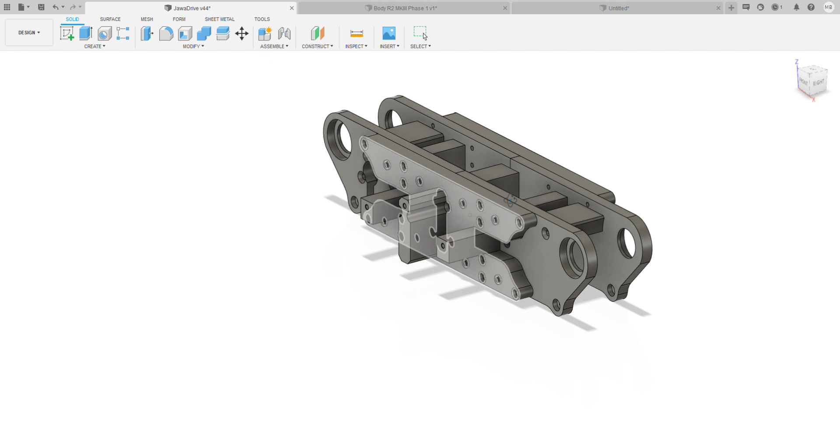Okay, just a little video on the Jawa drives. Just wanted to kind of talk through the basic assembly. Both the drives are virtually identical, the front and back. There's a very slight difference in how they're actually mounted.

So the rear drives, what you've got is two 6mm holes here and here, and there's a 6mm bar that goes right across, because the rear Jawa drives are fixed on that bar, and the front ones are actually on... In fact, I might be able to just show you the front drive. So the front drives are a little bit different. No, that's the steer frame. Yeah. So the front drives.

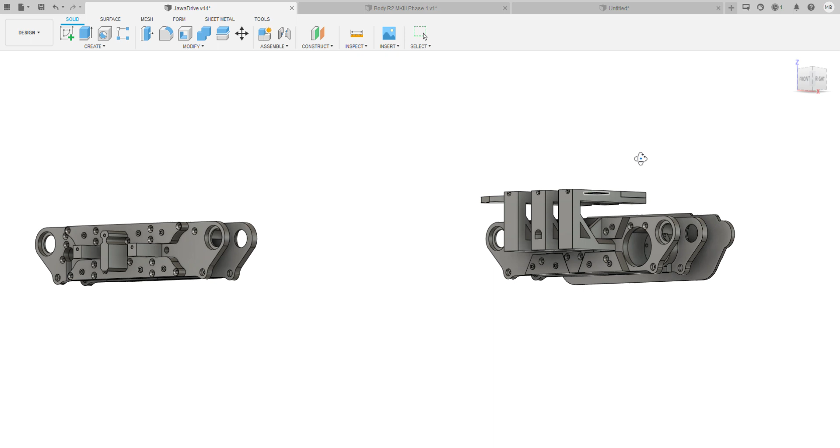There we go. The difference with the front drives is rather than the bars coming out, they've got these little U-shaped bars that actually provide the support, and the reason for that is that they're pivoted on top so that you can actually steer it. But other than that, the basic assembly is the same. So if you assembled any one of these, you'll be able to assemble the other three. We'll start with the rear ones. They're made up of a few parts.

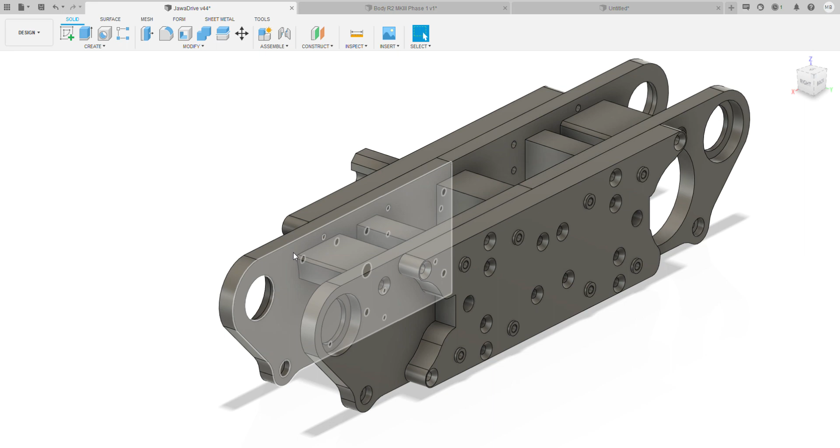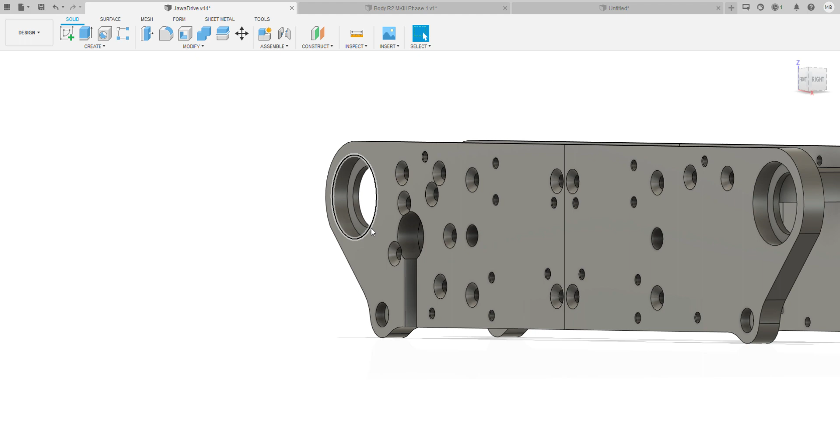The frame. So what I tend to do is print the frame up first. So you've got the Jawa frame. This is C, A. So you've got A, B, C, and D. I'll just take some parts off so you can kind of see how they go together. So there's four flat parts. These are printed obviously flat down. You've got some holes there for bearings. These are 24mm bearings, so 24mm in diameter. I'll grab the actual bearings out shortly so I can tell you which ones those are.

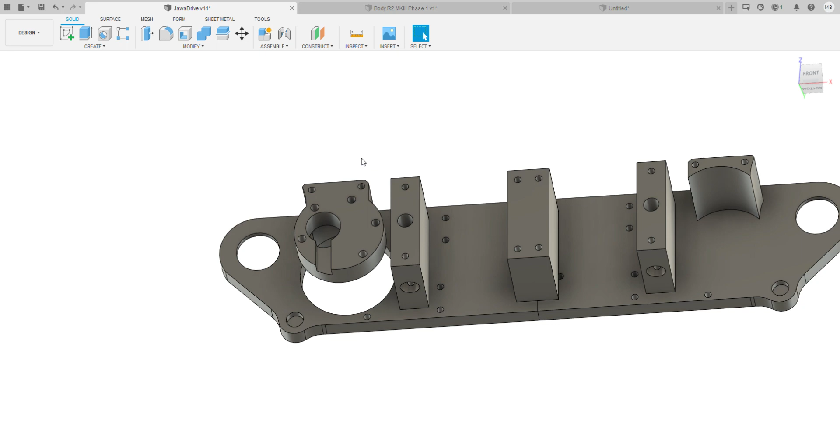And effectively what they do is they'll fit together like this. Fairly straightforward, to be honest. And then in the middle there's a number of frames. So what I'll do is I'll just hide them frames so you can see what you've got. You've got a center block, very simple block, 4 holes in. This just bolts there and there and there and there. When you first put it together it seems a bit flimsy, but believe me, there's a lot more parts that go on. You've got these 2 end blocks here, they bolt in place.

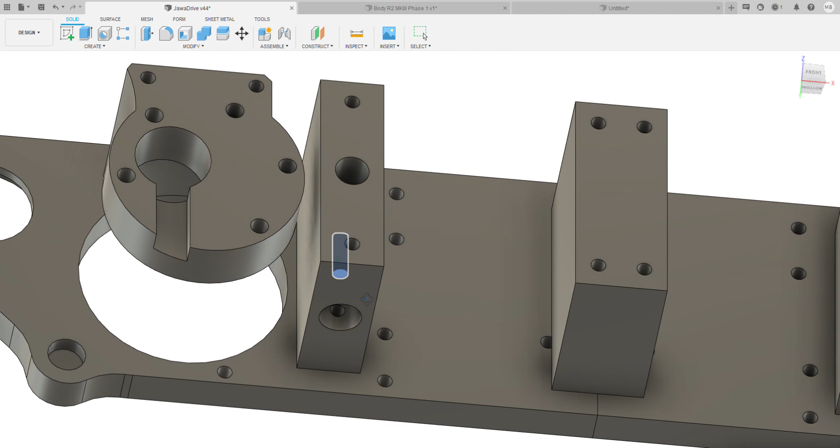Now notice under the end blocks, once they're bolted in, there's a little hole here. That's for a screw. It self-taps into there and it digs into the metal bar that we've got in there. So that's effectively what locks the drives in place with an M3 bolt. If I just do a rough measure on that, 10mm will probably get you through that to dig into that bar, to hold that bar quite solid on those two, and it does hold it solid.

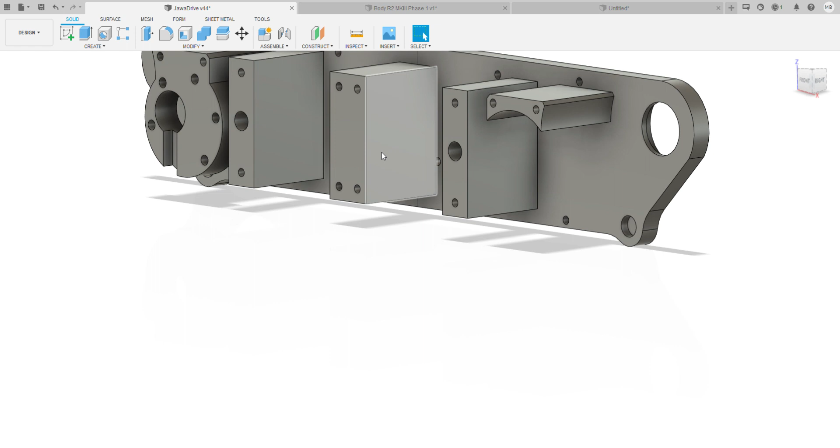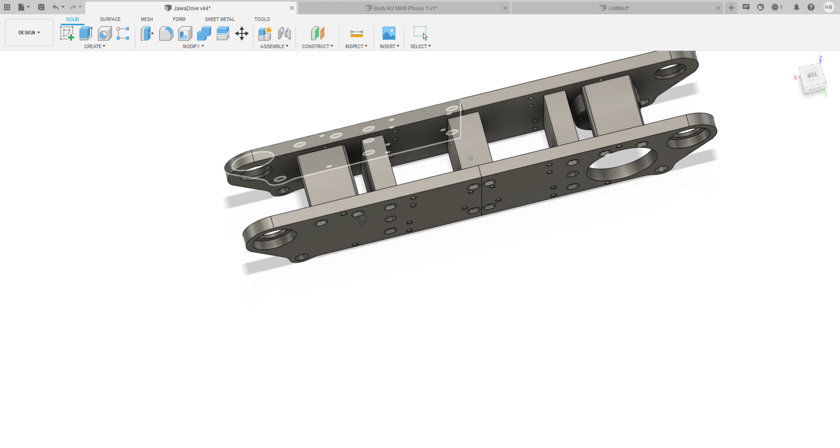Then you've got this frame and this frame. They're slightly different. This one here, which holds the motor, obviously goes at the end where you've got the big hole, because that's where the motor goes. So basically, put these frames together, bolt these parts on, and then you can bolt the 2 outer frames on, and you'll create this kind of overall build.

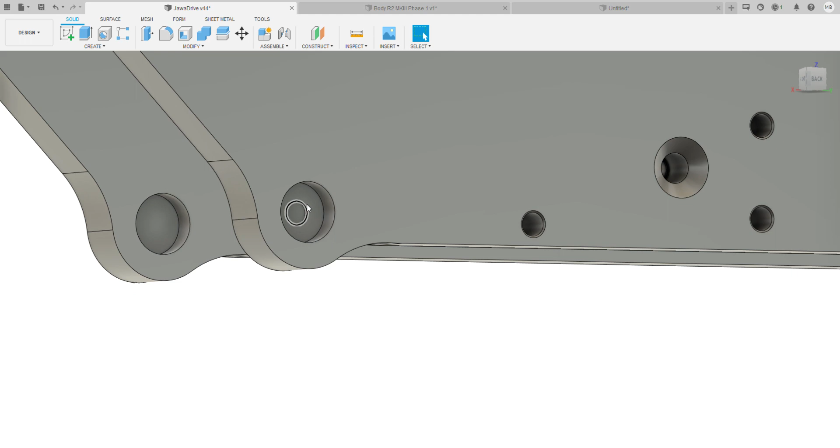Now you've also got these holes here. If you look on both sides of them, the holes are on both sides. These hold the 7 by 3 by 3 bearings. So it's 7mm diameter, 3mm hole, and 3mm depth bearings. You've got 2 bearings, one pops on that side, one pops on that side. So you need 8 of those bearings for each corner. And actually, when you start to add all the wheels, you'll need a lot of those bearings.

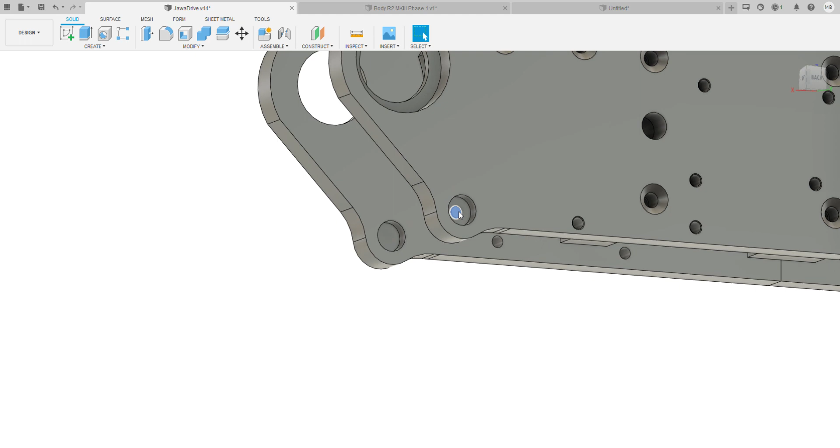Now these are sealed up. The reason for that is it's all down to the bridging, so that we don't have to have any supports. But you can do this at any point, like now, or you can do it as you take it off the machine. Grab a 4mm drill and literally just drill this out. It doesn't have to be perfectly central. All you want is a bit of a lip all the way around, because the bearings will make sure that that's centered. But make sure that you drill this out and just clean it up a little bit.

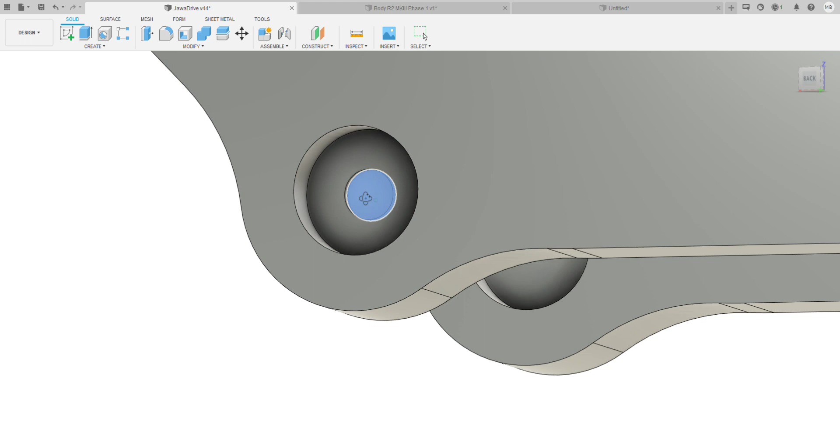So I've left it there. That hole is nowhere near 4mm. What is it? Yeah, it's 2.8. That's about 3mm in diameter. So if you get a 4mm drill, just drill it through there on all 4 of those corners before you start.

It just lets those front wheels spin a little bit clearer. If you haven't done that, don't worry about it too much. It'll all still function and work. It's just that really you do want to sort of drill those out.

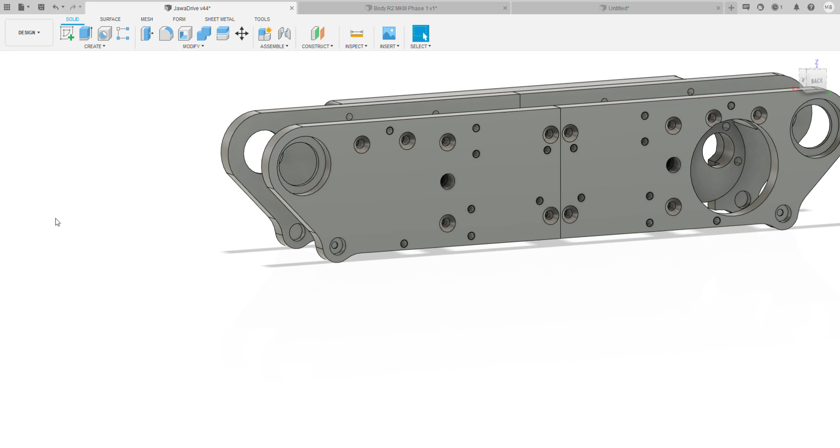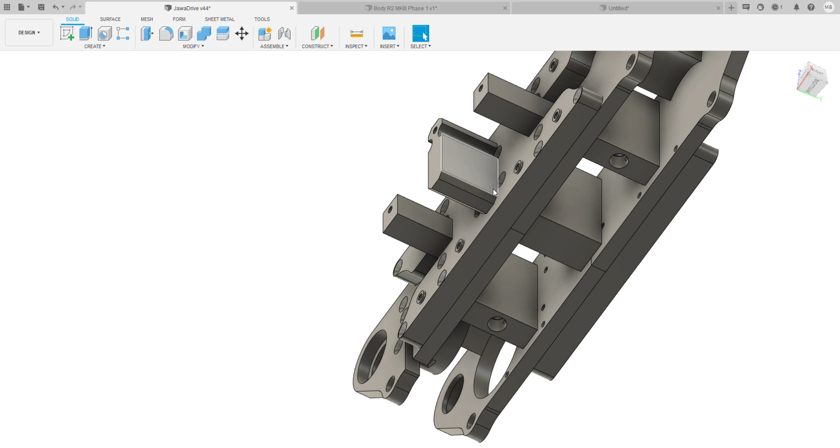Once you've assembled those, then there's 2 outer frames which bolt on the side, and they hold the main set of wheels. So we'll go through the wheels in a sec, but in theory you can probably assemble all of that together. Now on one side you've got these, on the other side you've got some extrusions that come out. The extrusions come out opposite side to where the motor comes out, and the reason for that is that holds the front fascia or front plate.

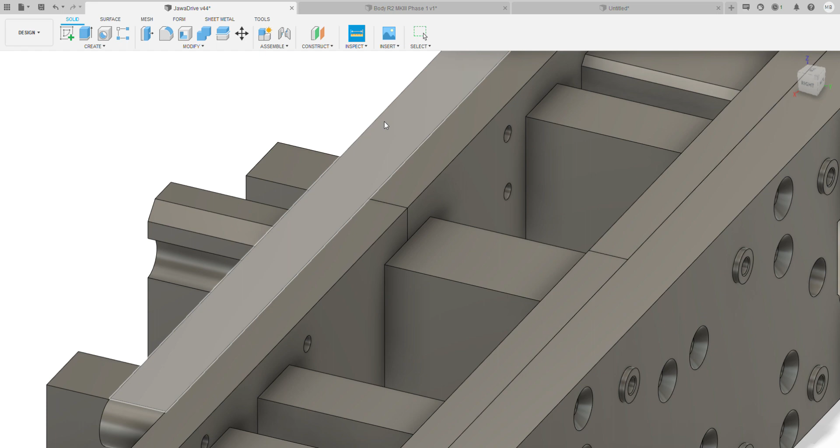So all these are bolted together with M3 bolts. This, for example, is 17 mil. So I'll put some recommendations when I write. You've got 10mm thickness here, so 15mm M3s will do it. But again, if you've got a collection of them, you can just measure them against the side up until the point when I publish all the instructions.

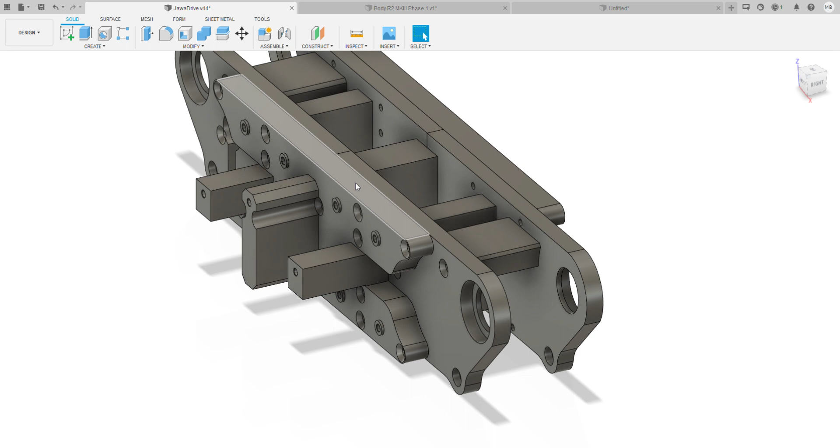There's so many bolts in here. You've got plenty of options on size. It's not absolute necessity that you need 15 mil. You get away with 12 mils or 15 mils or 17 mils or whatever you've kind of got. And if they extrude slightly on the inside, it's not too much of an issue.

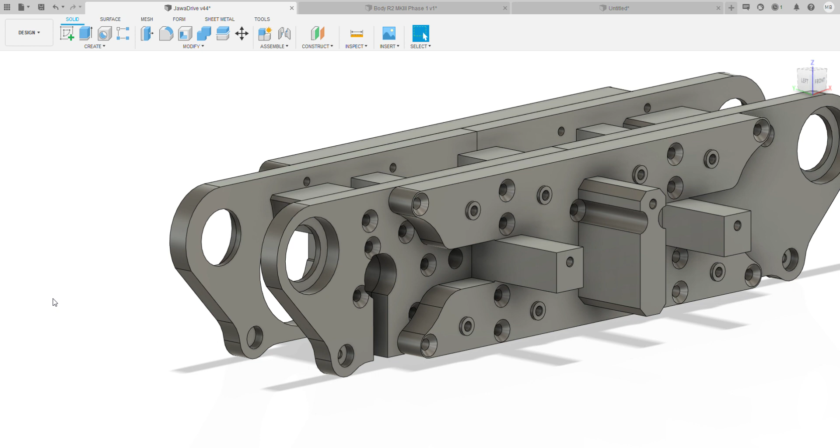Once you've built the main frame or the main plate, what you can do is you can pop these bearings in here, here, here, and here. So 4 bearings at the side. But the next thing to probably add is some of the electronics, well, some of the hardware.

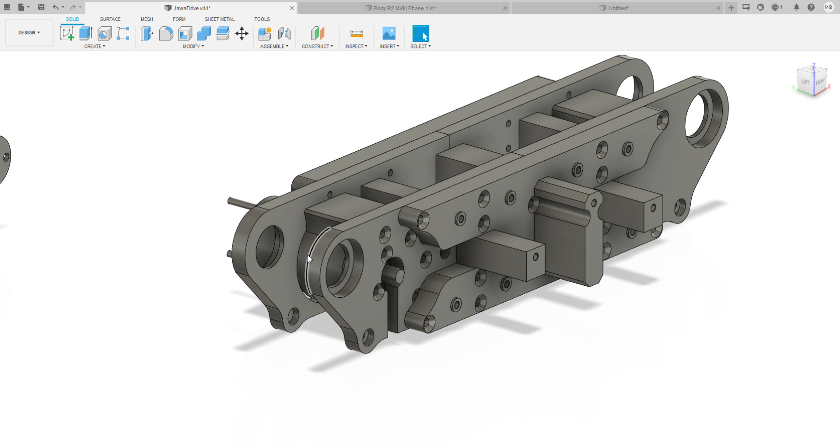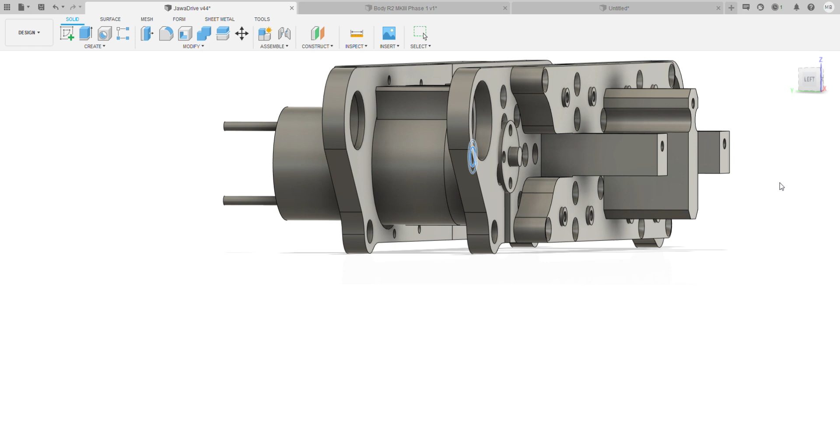So there's 2 things. There's the Pololu motor, which these are the 37D motors. I think I used the 19:1 ratio ones on this, and then there's a Pololu coupler, which is this little thing that holds the gear. So I'll just move that to where it should go, so that coupler just drops onto there like that. And it obviously doesn't push that far in, so you can actually just move it out a little bit like that. So it kind of sits in around about like that, and that holds the main drive gear.

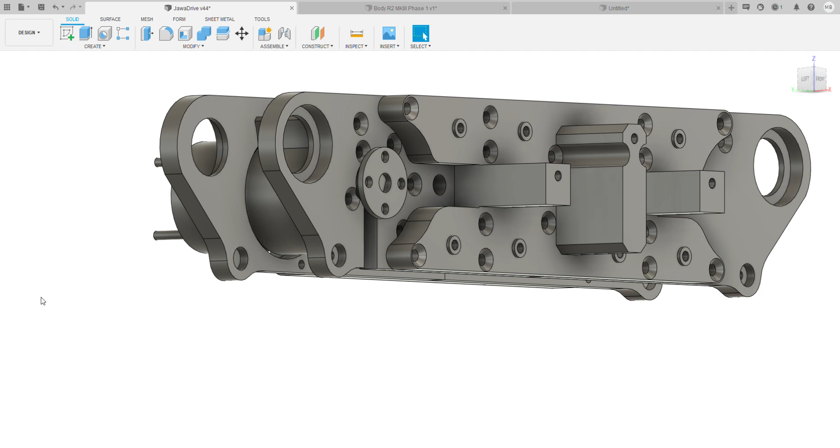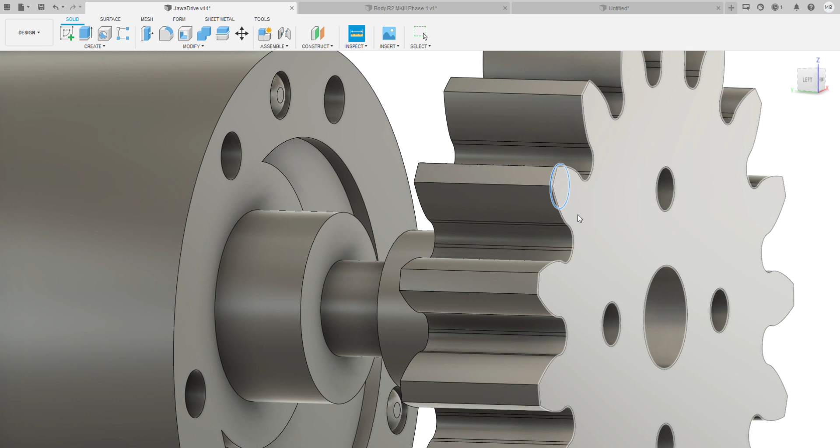So you can pop the motor in. Don't pop the coupler in just yet. You've then got the remaining piece. So the reason we don't pop the coupler in is this gear. So the way this assembly works is you grab the coupler, you put in, I think it's M3 8s will probably do, M3 8mm. I'll just do a quick inspection. Yeah, it's 7.3. So M3 8mm bolts. Pop that in.

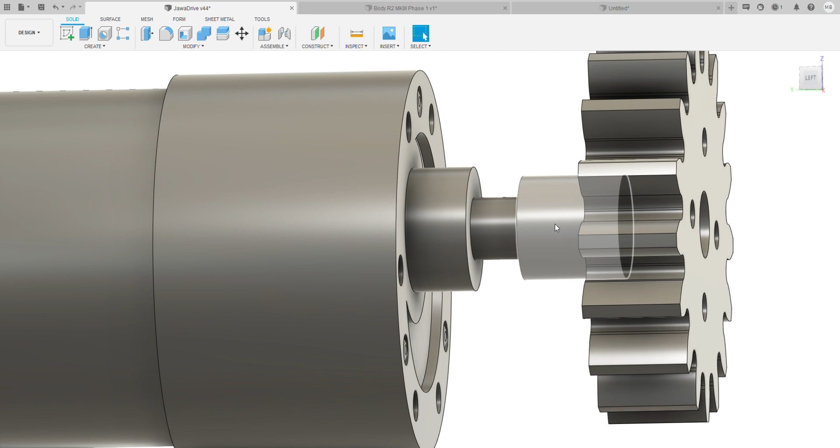4 of them in, tighten them up, that will attach the gear to the coupler, and then the coupler, you've got a couple of grub screws which hold it on. I'd highly recommend you use Loctite on the grub screws, because however tight you tighten these up, they will loosen up. I've got to say with Loctite, keep it away from printed plastic. It dissolves it, it makes it brittle. If you get any coloured Loctite on these gears, they'll just crumble. So use toothpicks or small bits of Loctite.

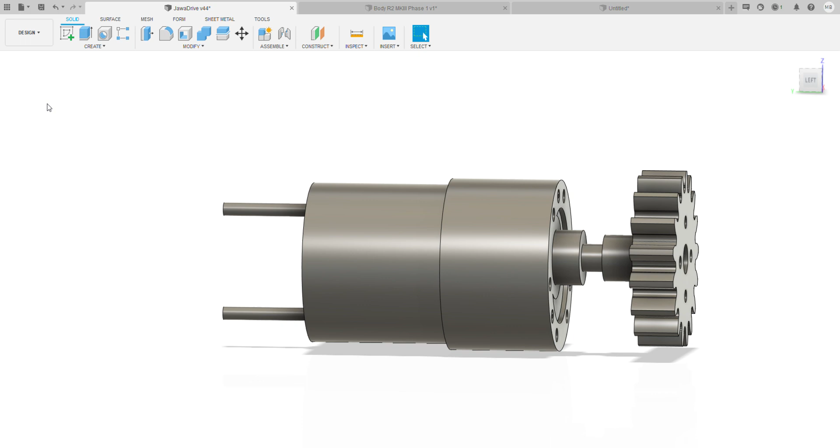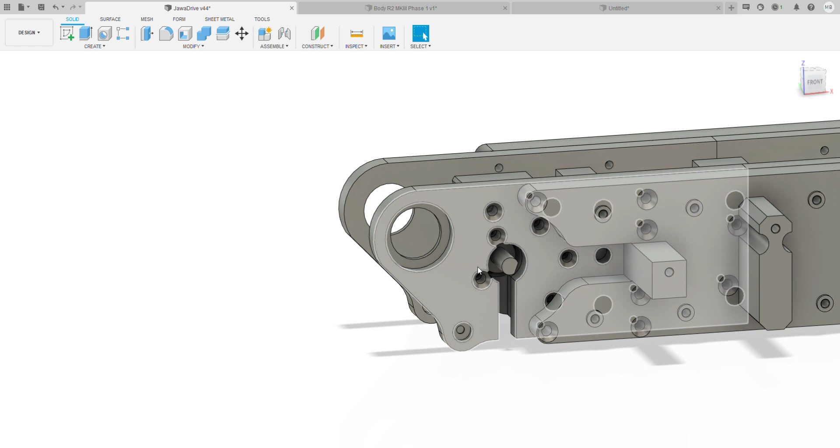Once you've got that gear on, you've got your frame on, you can actually put this whole thing into the frame. Then before you actually put the coupler on, you've got a number of bolts that go round here that attach this motor onto the frame. Tighten those up, and once that's in place, then you can add the coupler and the drive gear. So you should end up with that, and then this gives you this side here where you can solder a couple of wires on, and that's your drive motor done. So once you've completed that, we can then move on to the gear assembly.

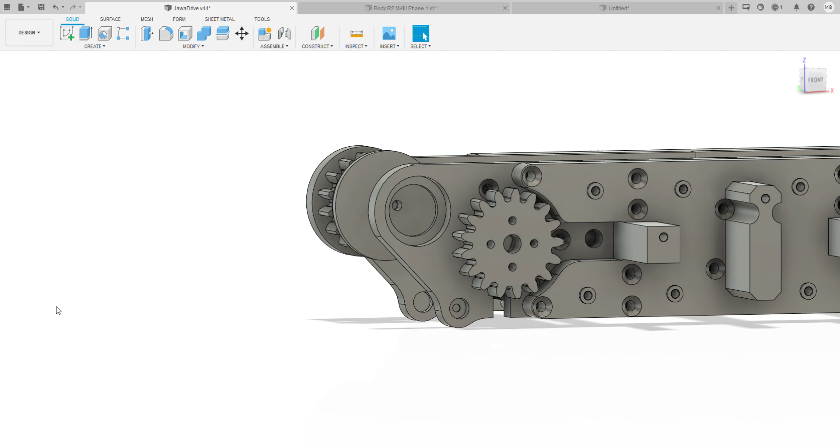Now with these 2 bearings in place, your gear assembly is made up of these 6 gears here. Oops, not 6 gears. Your gear assembly is made up of these 5 gears here, so apologies. So you've got the A gear, you've got this little plate here, you've got the middle, you've got this little plate, you've got this gear on the outside, so it's kind of like a sandwich.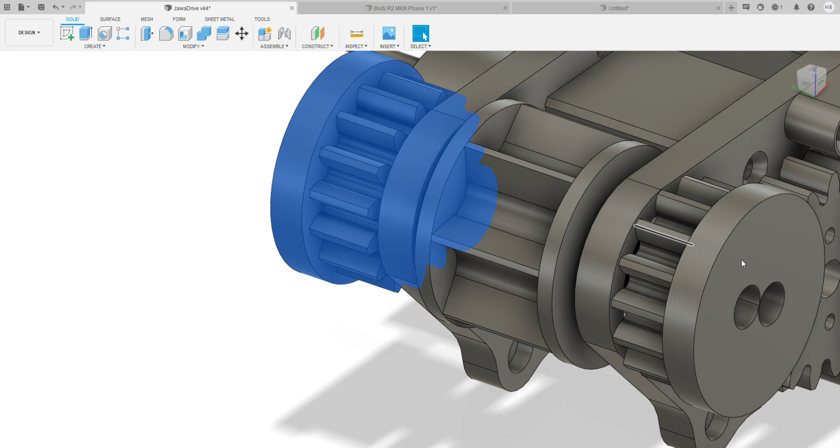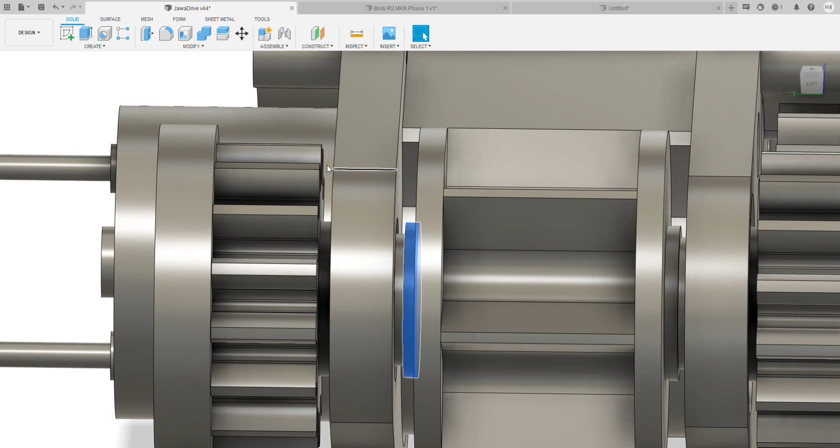Now be aware that these little plates in the middle can theoretically go both ways. You want no gap between this outer plate and the little star drive in the middle. If you reverse them, there's a little spacer which you can probably see just about there, and that'll rub against that side plate. So you want that little shoulder there to go against the bearing.

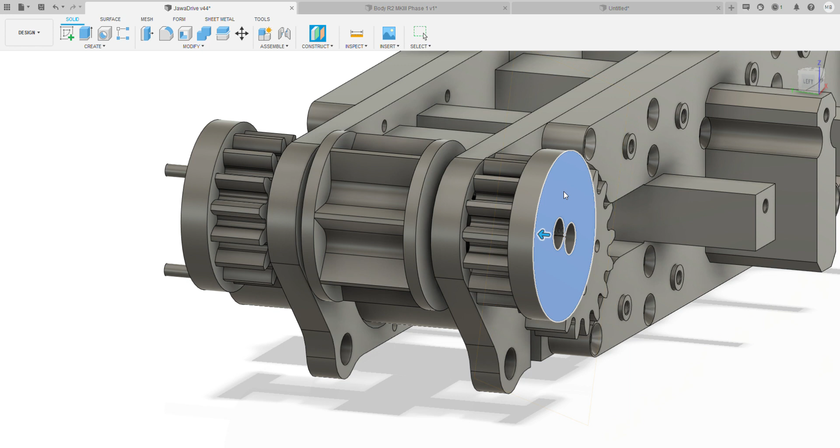These are held in with two 35mm M3 bolts, which kind of go through there. I'll just show you kind of where 35mm goes through. So your bolts will bolt right the way through into about there. So you can get away with 35. You might get away with a little bit further, but I tended to use 35s. Two 35s either side, and they go right the way through to that middle bit. So it gives a really good solid piece.

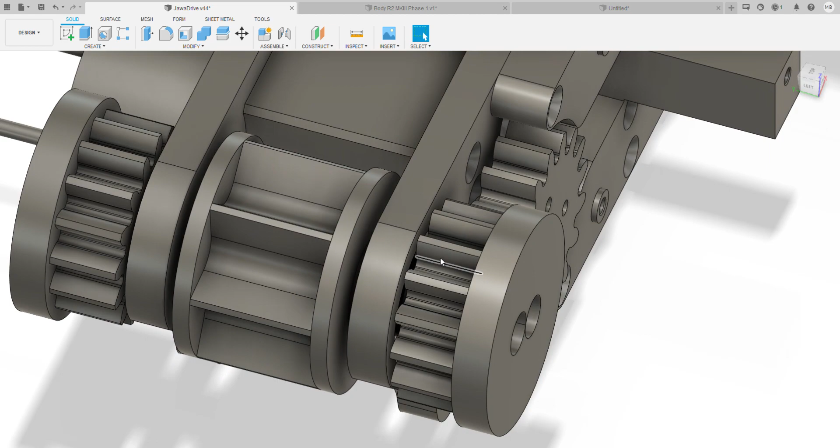And obviously then this gear meshes with this gear. So all you want to do then is just check alignment. If you need to adjust it, you've got access to the grub screws in this little gap at the bottom here. But you really want that in place, and you want that spinning quite freely.

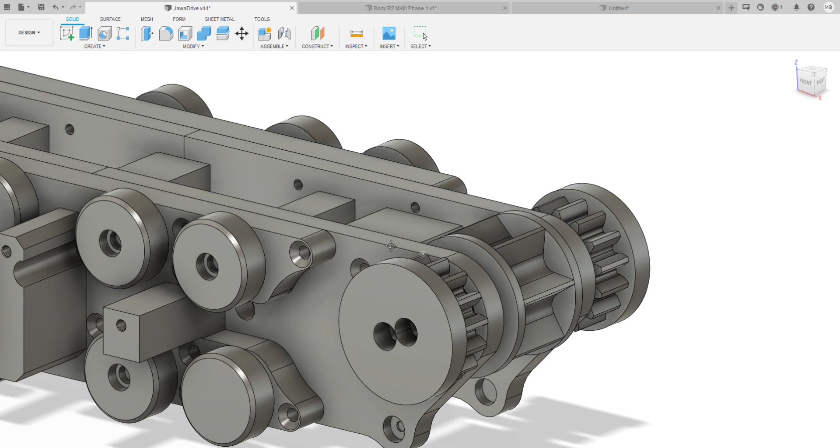Once you've built that one up, you do exactly the same at the rear. So I'll just turn the rear on. So there's another one of those, but this one is freewheeling. It's just free spinning. So you do the same assembly there. And to be fair, the actual assembly is quite simple. Once you've got those two in, you've got the drive going.

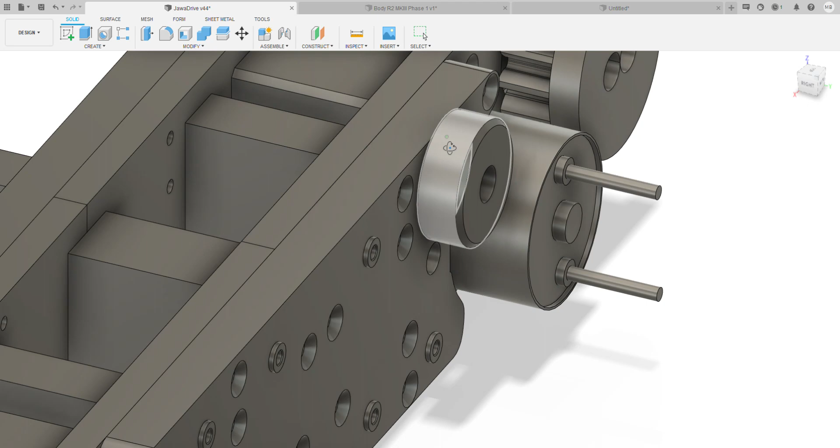The next thing that we tend to put in is the little idler wheels. So I'll show you these again. So these are the wheels. You'll need 16 of these, and these take the 7mm by 3mm by 3mm bearings in there. So 3mm hole, 7mm diameter, 3mm deep, and you've got one bearing on one side and another bearing pushes just on the other side into there. So each of the wheels have two bearings.

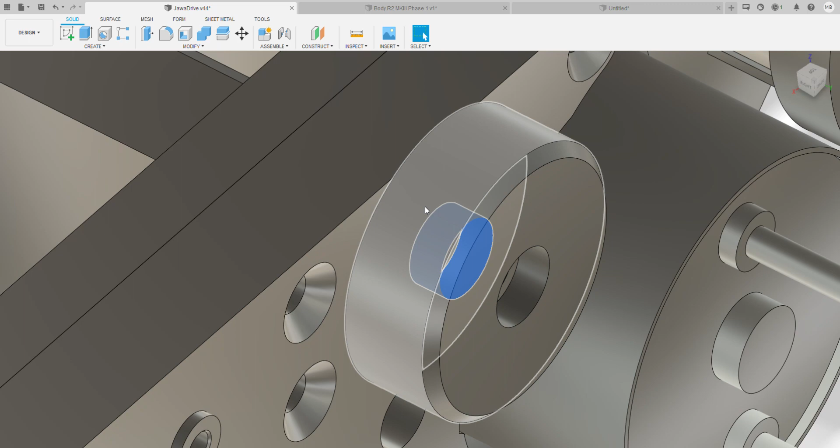So you can imagine that's 16 wheels. That's 32 bearings. Plus the 8 you've got at the front, you're up to 40 bearings already. So there's quite a lot of bearings on this. Same as these little things here. There's a hole in the middle that you can just use a drill just to drill out with a 4mm drill, just to clear that out.

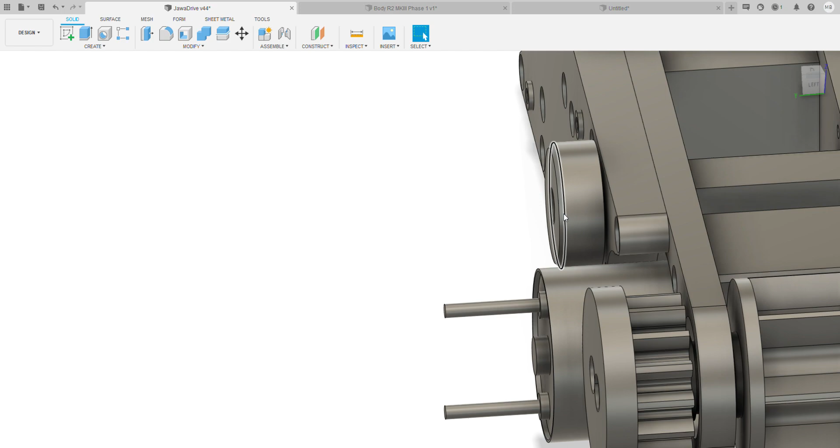And then what happens is you pop these on, and these will actually then mount onto this plate with about an M3 20, so a 20mm M3 bolt goes through that bearing and holds it on there. What I tend to do is tighten it up just to the point when I can feel a bit of resistance, and then just backing it off a little bit so it spins freely.

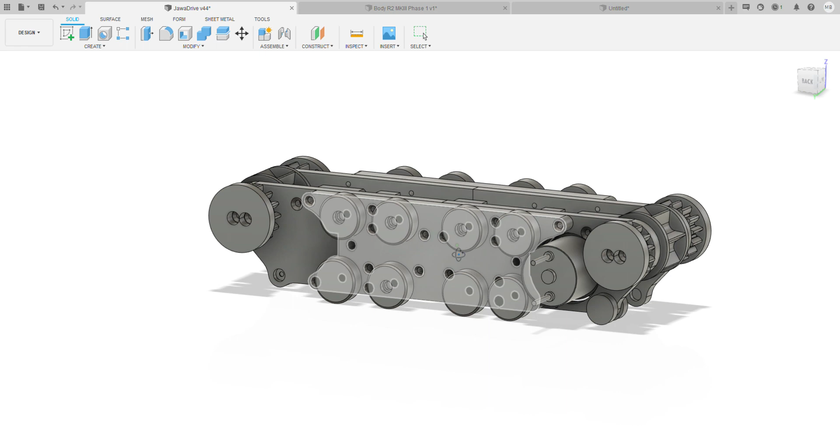Once you've fitted one of those on there, you can literally just go around then and fit all the other ones. So there's a lot of these, so you just pop all these on all the way around. So once you've got these on, the last thing to do then is to put these idler wheels on, which are on the corners. So if I just show you those, you'll see these are tiny ones. You need 4 of each.

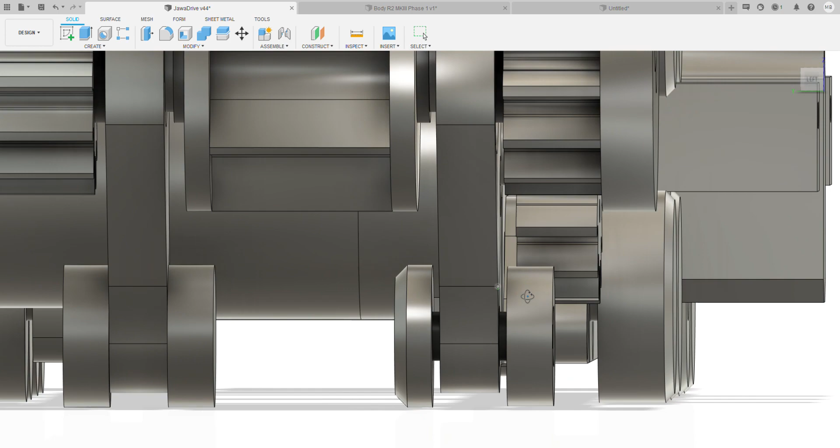And again, just watch out for the bevels. So the bevels on these wheels here go on the outside, and the bevels on these wheels here go on the inside. You'll see some of these that haven't got holes in. Don't worry about those. Those are just spacers on my CAD. They're all the identical same part. Same with these that haven't got holes in. These are me just getting some spacers when I first started to do the CAD.

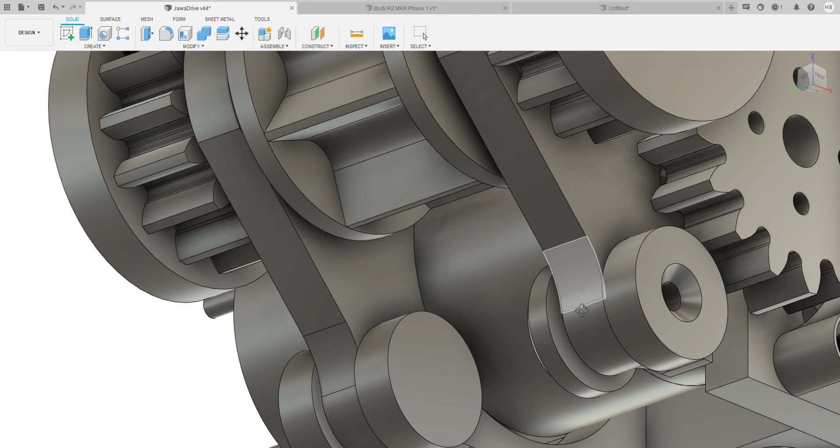So these are really simple. The bearings are actually already in there. You should have put one bearing on either side into the frame. So all you're really then doing is taking an M3 bolt, which 20mm or 18mm actually will probably do it. An 18mm M3 bolt goes through there, through the two bearings out the other side. There's some little shoulder spacers either side, similar sort of thing. Tighten it up, back it off, make sure it's loose.

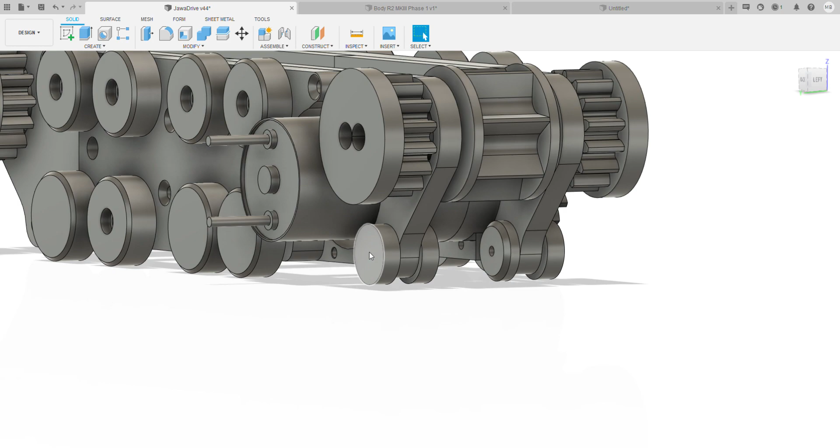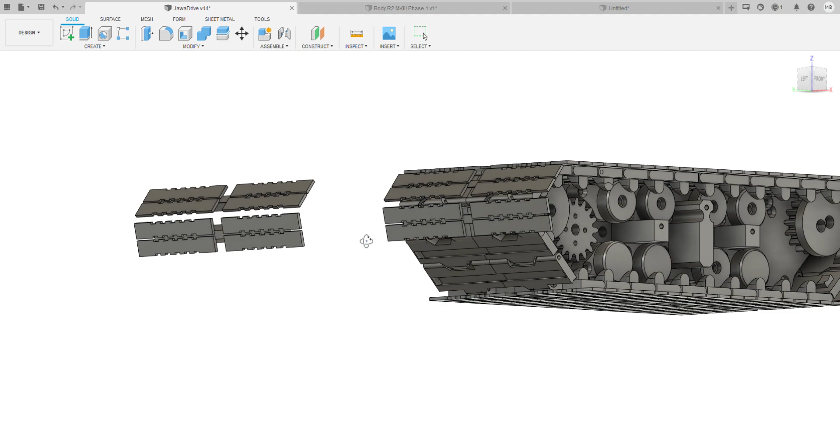Then all you do is repeat that on each of these 4 corners, and that's pretty much your drive system built. Now once your drive system's built, your next thing obviously is tracks. The tracks do take a while to print, and there's a lot of them. There's nothing I can do about that because the Sandcrawler is a massive tractor vehicle, so you've literally just got to print all these things out.

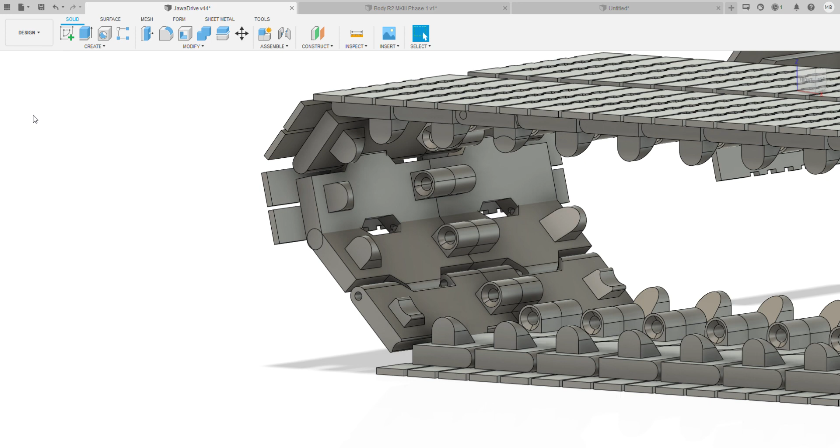The assembly of the tracks, now I'm just going to see if I can get a good view on this. It's the advantage of showing you CAD stuff rather than real plastic stuff, I can start to hide stuff and animate stuff and all the rest of it. So if I just grab some tracks to show you. Select bodies. Okay, so 1, 2, 3. I'm just going to move these out of the way so I can show you exactly how the tracks assemble. So this is one track.

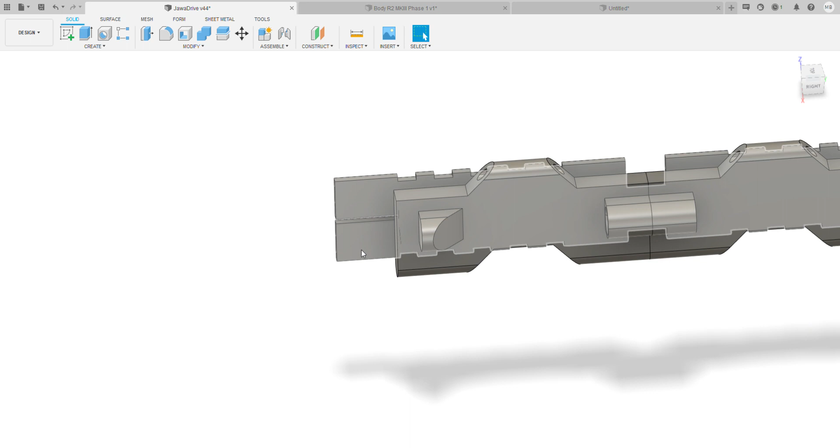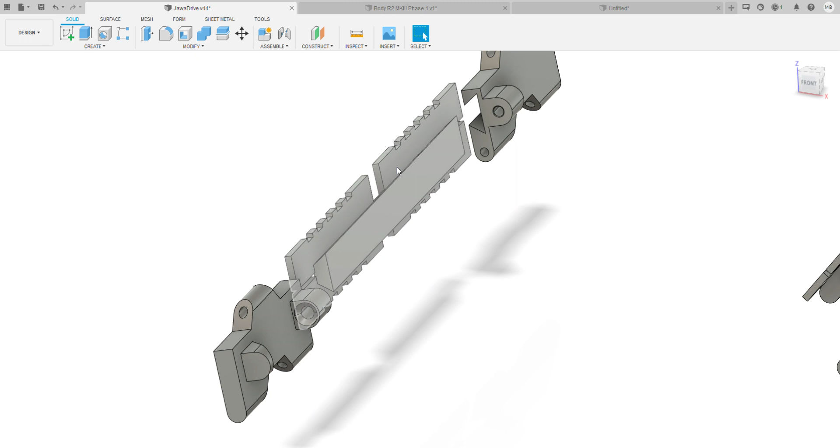The track assembly is actually quite easy. They take a long time to print, and each track consists of 3 parts. So you've got this middle piece here, which is the track. This is printed in flex, and you'll see it's got a little dovetail in flex. The reason I've done that is to minimise the amount of flex that we use, and also to reduce the wear. Flex is brilliant. It doesn't really wear at all. The weight of the Sandcrawler is not enough to create wear, so it works.

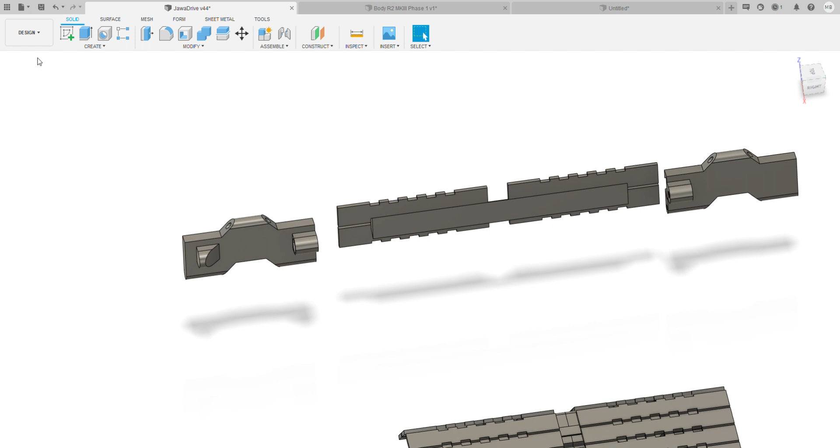And once you've put that on, you've got 2 of these. There is a left and a right, and literally these just push on one side, and then the other side. You'll see that one side's got a little dovetail, the other side's got a flat piece. They dovetail and just push together. When you push them together, there will be a very slight gap in the middle. It's intentional, just to make a tight assembly. It should only be a little gap. If it's a big gap, just check the ends.

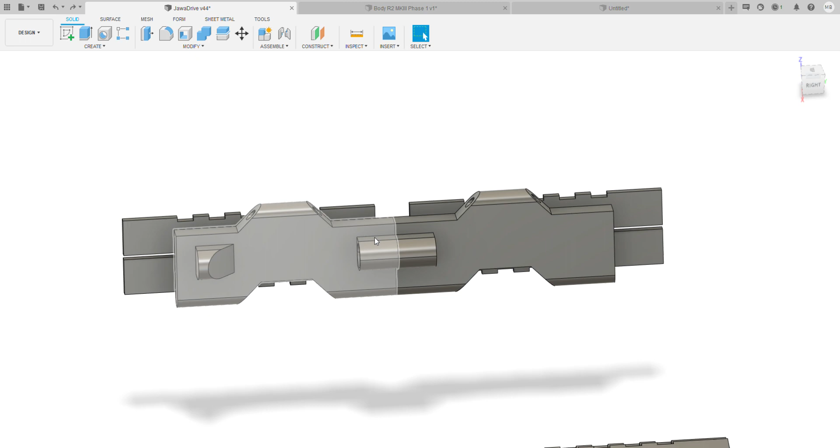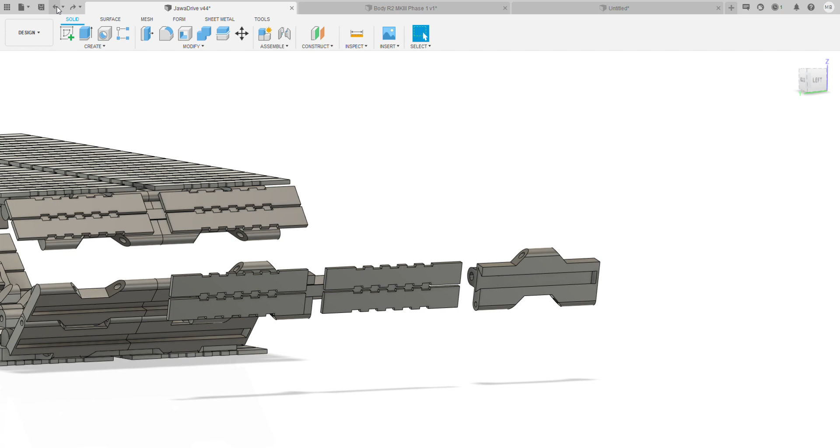Oops, what have I done there? There we go. Yeah, if it's a big gap, check these ends here where this bridging is, just to make sure there's no bits of plastic stopping that from moving. So once those are together, you pop an M3 20 screw on there. Let's just measure that. So that's exactly 20mm. So an M3 20mm will go across there. M3 18s, it doesn't matter, either will hold them together, and you've made one track.

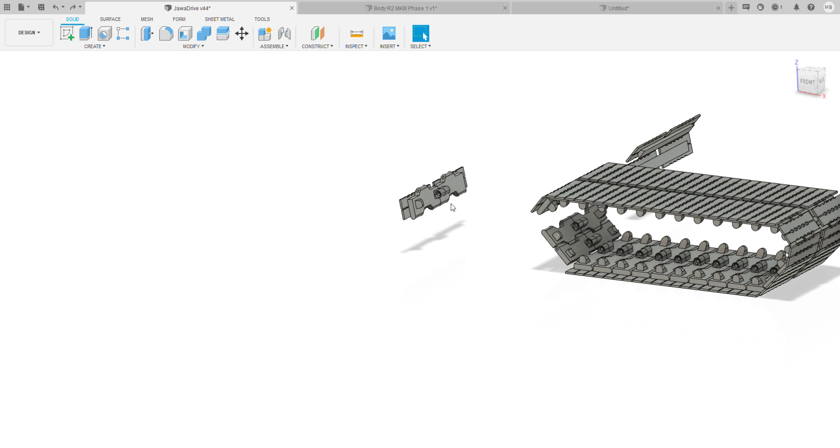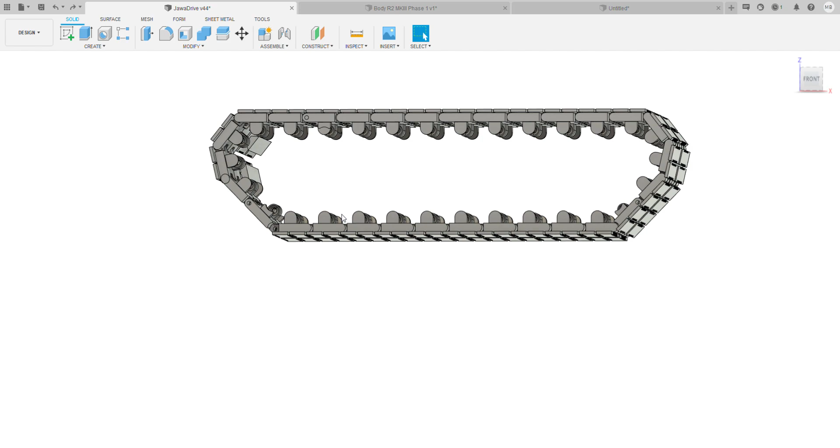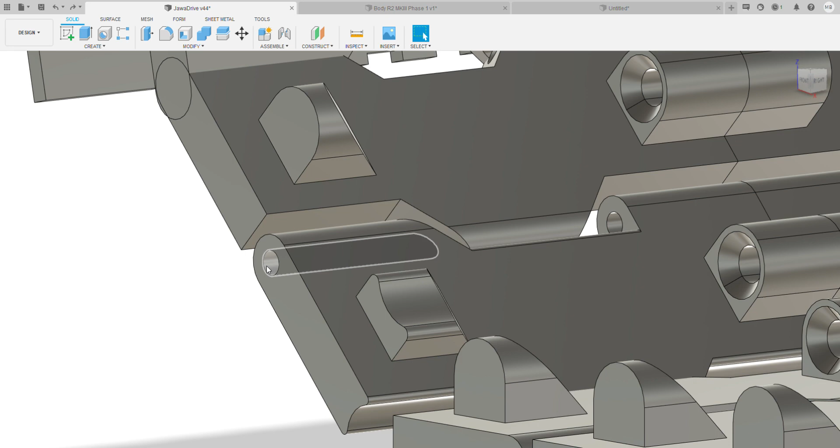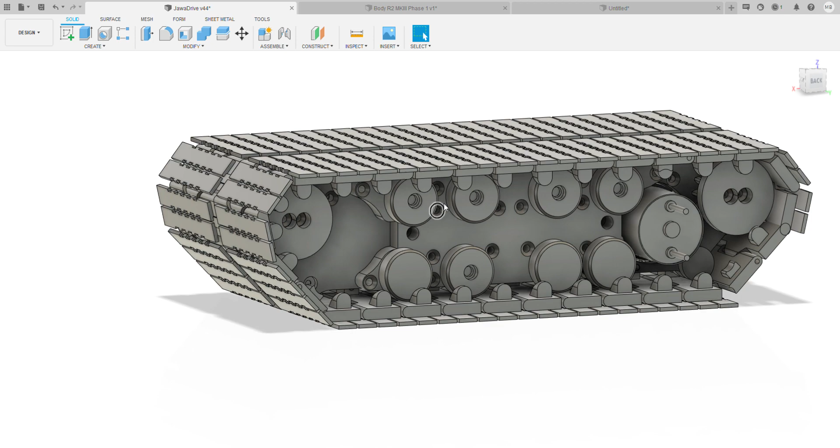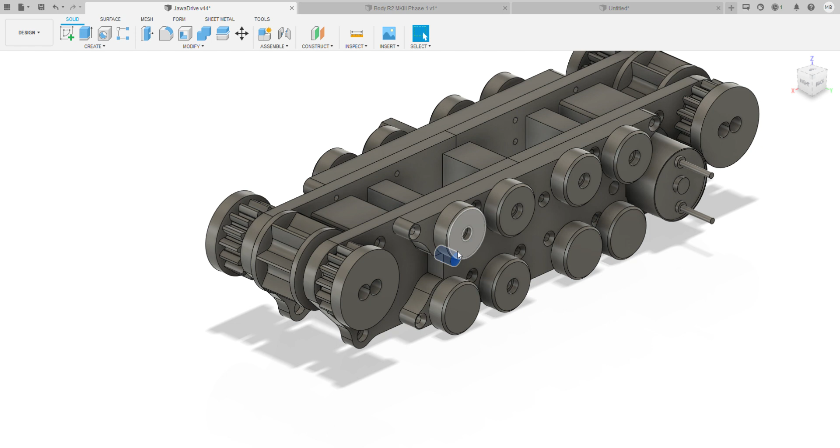Repeat all the way through until you've got a full flat tread, and then you can attach the treads. You wrap the treads around the main drive, and then put the last piece in. Now, a little bit of a gotcha on this: make sure that when you are attaching the treads, you've already put in your 6mm rods that hold these together, and you've tightened this screw up here, because you haven't got access to these screws once you put the treads in. So you build this first, put the rods in, get this into its fixed position, and the last thing you do is put the tracks on.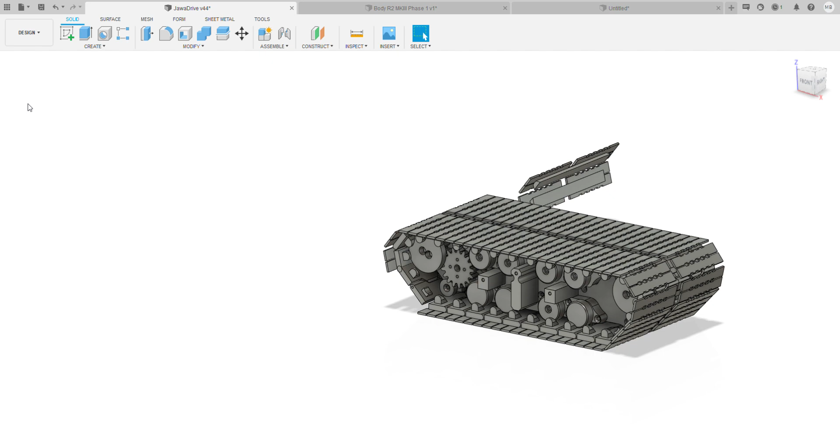I tend to leave the last rod sticking out a little bit, just in case I want to go back and revisit the whole thing, if I need to make some adjustments or I've not got access to something. Then literally it's just a matter of repeating the same for the others. The front drive's exactly the same assembly. The only difference is it's slightly different in how it prints. So this one, the front assembly, the frames are a little bit different.

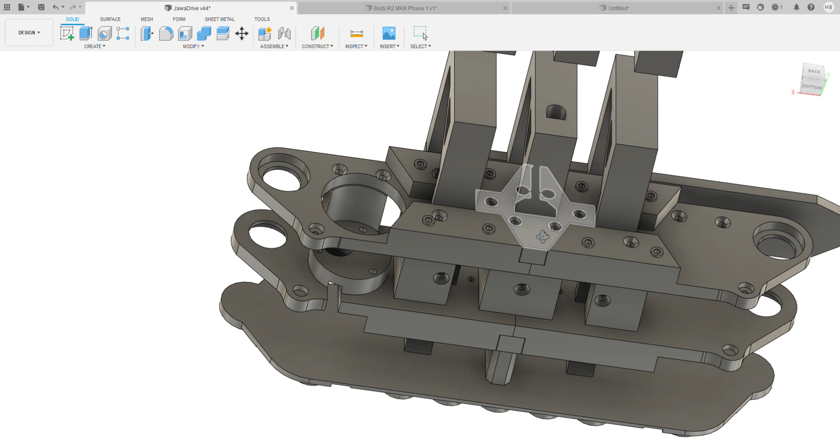As you can see, they've got some inbuilt parts here into the print, and then they've got these little shaped pieces that hold it together. But effectively, once you've understood how one assembles, these other ones assemble.

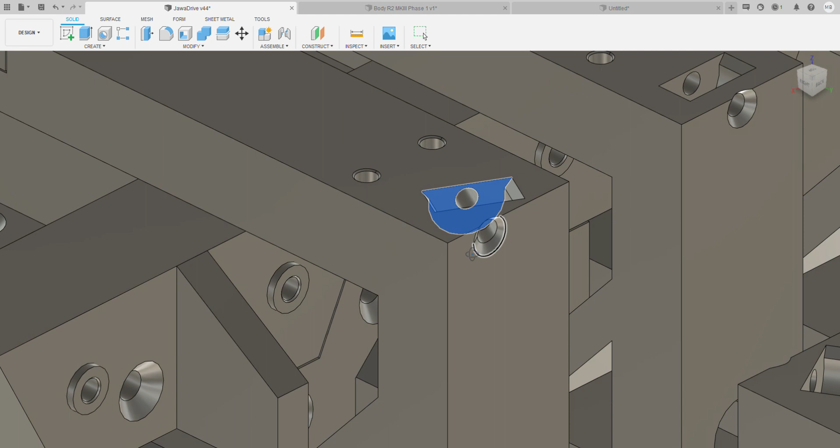On the fronts, what you've also got is some captive, again the same bearings, 7mm by 3mm by 3mm bearings that go there and there, and then you put a bolt through to hold them. The reason that they are is that these sit on a flat plate, so they take some of the weight, so that all the weight's not just on that single bearing.

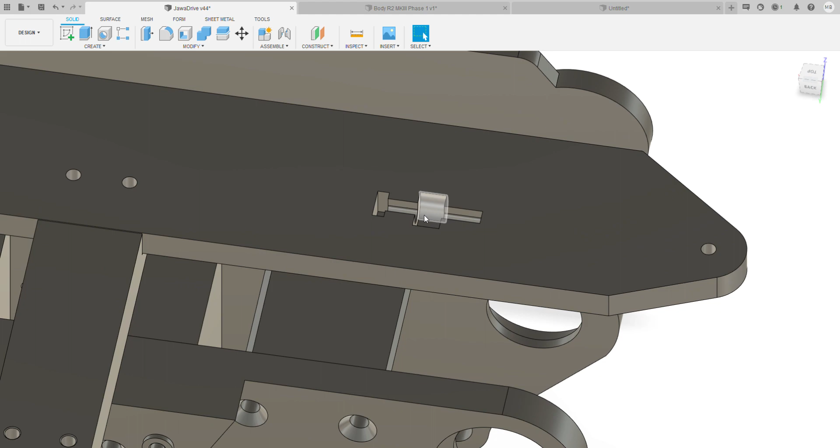And there's another one here which is a 3mm bearing, and then you can take a self-tapping M3 bolt. There's 20mm there, but 18mm or whatever you want, and literally it's just a push fit, so that just slots into there. And all those bearings do is take the weight of the main frame in addition to this bearing here, just so that we take some of the weight off.

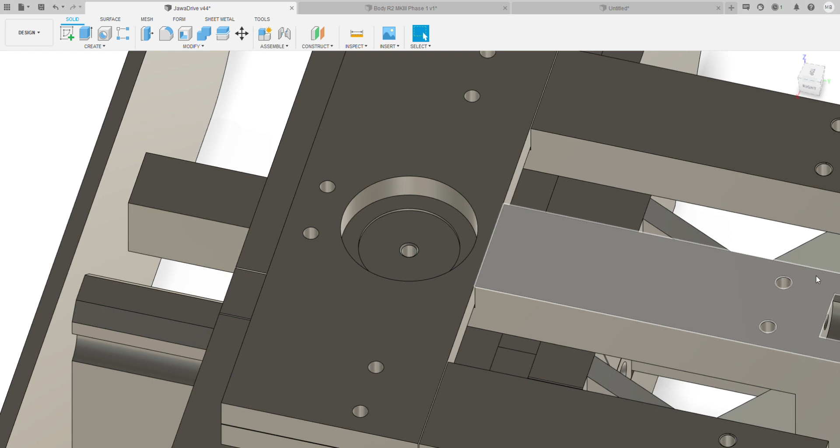Same bearing that we've got, which is this 24mm diameter bearing. I'll make sure we get the right bearings out. I think they're 15mm ones. I'll drop the bearings that are needed in the instructions in the notes on YouTube. But there's only two types of bearings: the big ones and the small ones, and you need quite a lot of both, really.

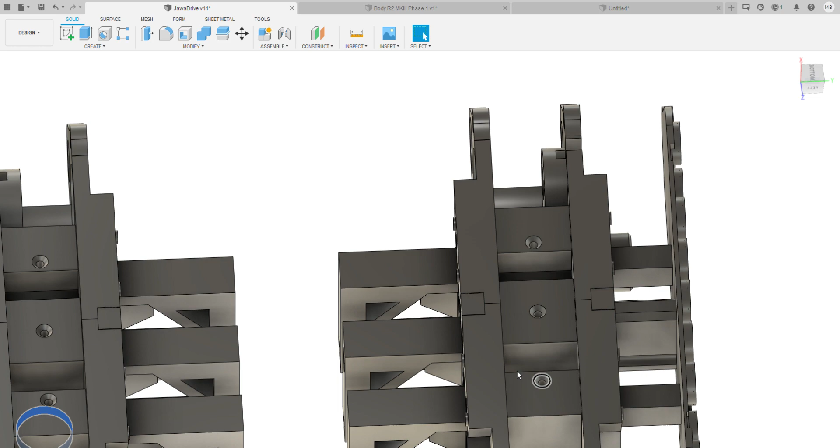And then these bolt into here with 3 bolts on the bottom, which hold those 3 frames, and these frames are bolted together like that. So you've got a bit more assembly on those frames, but again, it's all fairly common sense. And that's pretty much your drive system, and obviously the drive system fits into that whole piece on the rear.

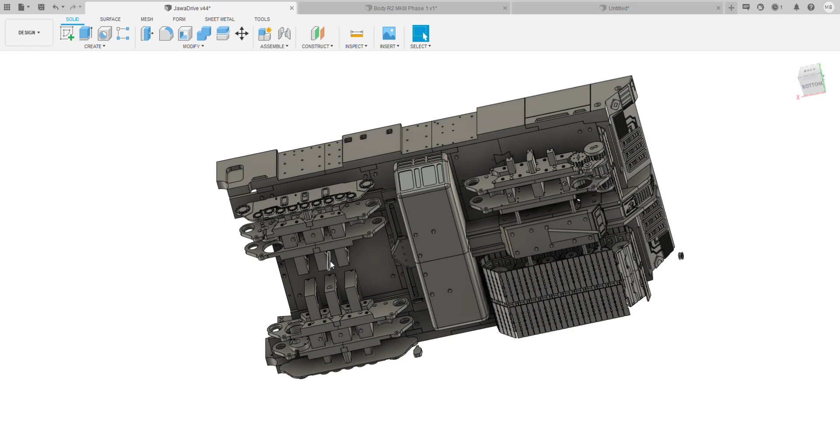I'll quickly just show you the under assembly, so you can get a bit of a picture. I'm still just working on this end piece here, this front bit. The reason I haven't completed these 2 edge tiles is I'm going to use them to hold the front opening mechanism, so it took a little bit longer because I have another project to do, but don't worry, it will be done very shortly.

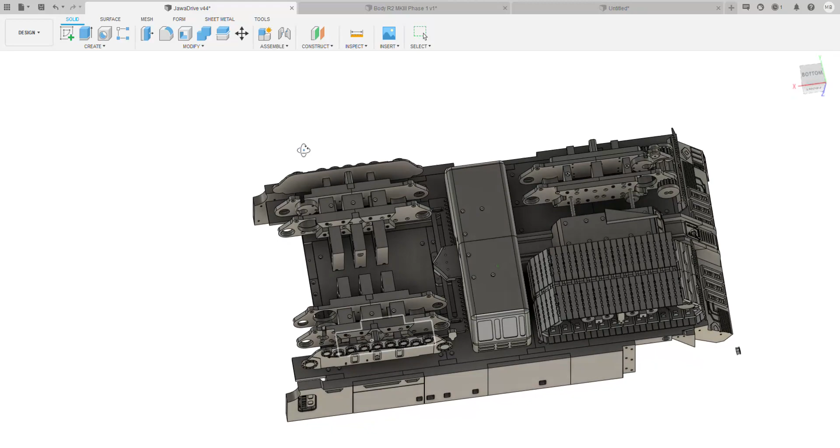Then you've got similar things on this frame. There's a couple of bearing holes there and there, and then you've got a bolt that goes through it that holds onto the steering mech. It's basically rack steering, so those go onto this rack. I'm not going to go through the full steering assembly, I'll just show you basically how it assembles.

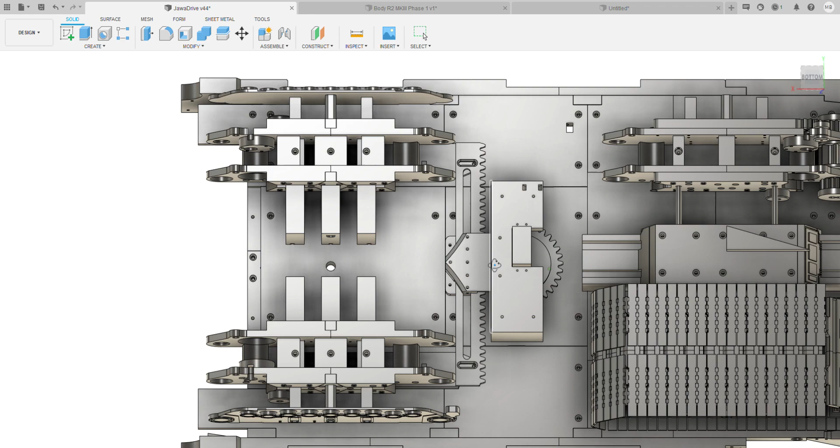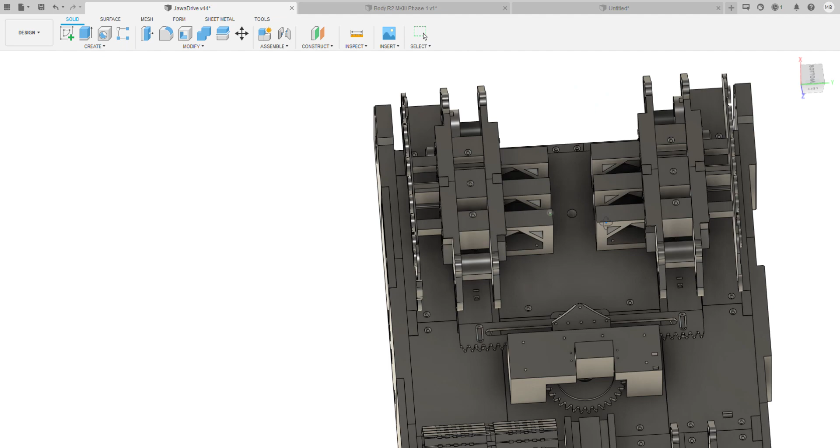You've got a rack, you've got 2 parts of a frame, you've got the servo, and the servo turns this gear. I've moved away from gluing that in. I've actually used bolts to bolt that in because it's a bit more of a solid grip, particularly on these 25 kilo servos, which are quite chunky little motors. There's also a hole drilled in there which allows you to put the cables, just to make sure the cables stay clear when it actually starts to steer.

And then you've got a similar thing at the rear. The rear sits on this fixed frame, but you've got these 2 little holes either side, which is for cable, so that brings the cable through on this side to the front. And that's pretty safe.

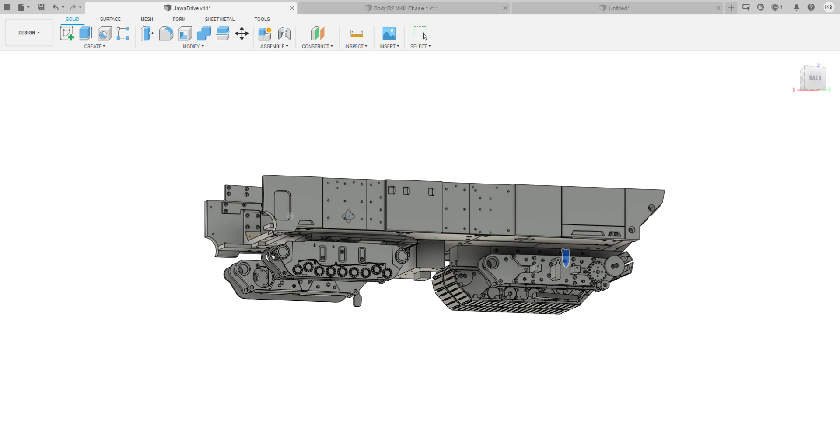So I just wanted to get a video out there, since I know there's a few people assembling these. It just gives you a few gotchas and a little bit of an overview of the assembly of the drive. It doesn't replace the instructions along with the parts. I will put them together. I'm dreading doing the instructions on this because it's going to be like that.

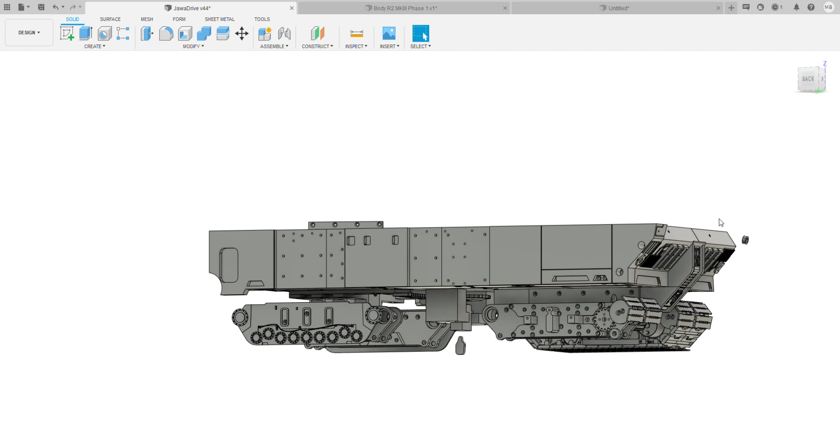So hopefully that was useful. If you've got any questions, just ping me in the interim while the instructions are out. Happy to talk through any specifics if you get stuck on anything, but that should cover most of the drives.